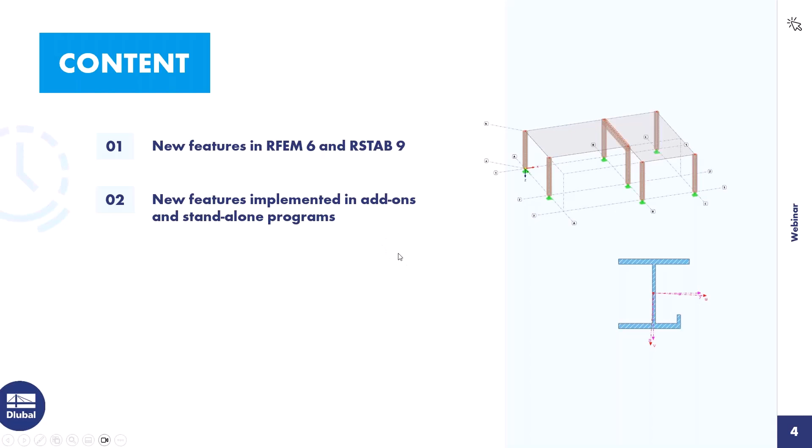Okay, then I come to the agenda today. First point is new features in RFEM 6 and RSTAB 9. I introduce some features we implemented in about the last year. Then new features implemented in the add-ons and standalone programs. The first point is for features that are directly in the main program, and those features are in the add-ons and standalone programs. Then I introduce new add-ons, and the last point is prospects. I give an overview of what we schedule to implement in the next time.

The main presentation is in PowerPoint, but I will also introduce some features directly in the program, but only for features that are in RFEM 6. I think those are the features that most of you are interested in.

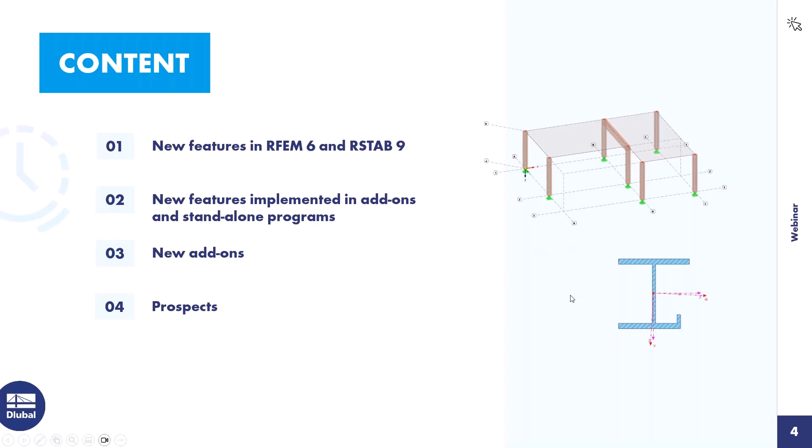Okay, then I come to the first point, new features in RFEM 6 and RSTAB 9. First feature, support force transfer from another model. We implemented a load wizard for that, and you can transfer reaction forces as nodal or line loads from one to the other model. I will show that in the program.

Next feature, new interfaces. We implemented the Tekla Structures bidirectional interface, then the STEP interface, then RSF for Allplan, and SVG. Those are vector graphics. So then I turn to the program and I introduce the first feature, the load wizard for the support force transfer.

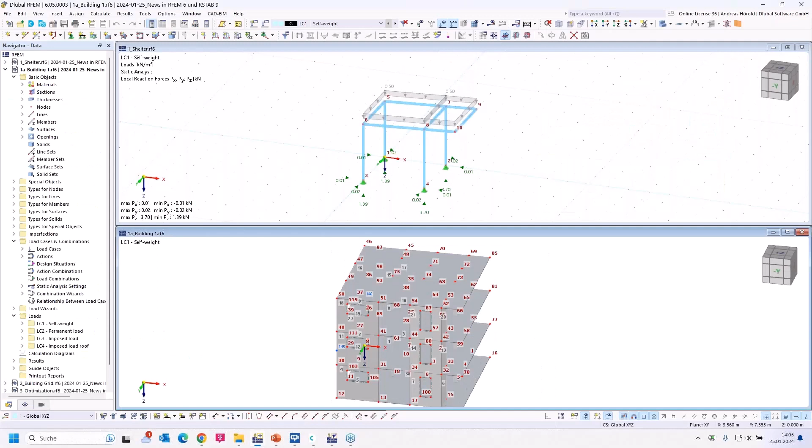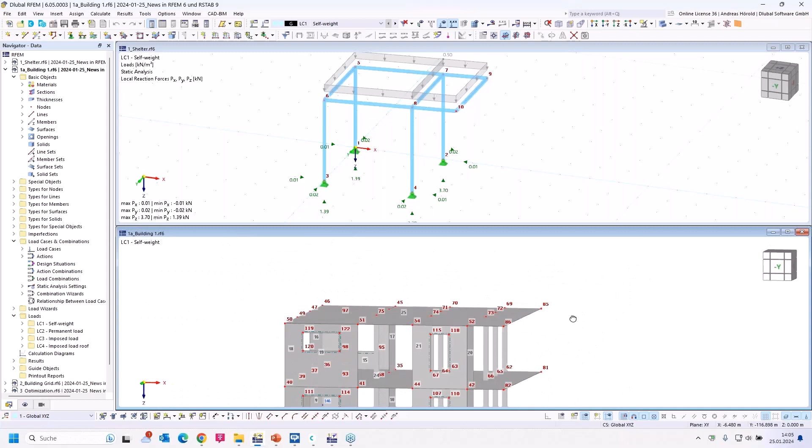So I prepared those two models. That's a small shelter that should stand on that roof here. And the 4 columns should stand on these 4 points. I select only the roof slab so that we get a better overview.

So that's quite better. And now I turn to Insert in the menu, Insert, Load Wizards, where you can see all the load wizards, the member loads wizard, and snow load and wind load wizards, and that's the new wizard, and I open it.

Important information: when you want to transfer a load from one to the other model, the models must be placed in one folder in the Dlubal Center. So I have several models in one folder. Those are the models for today, and that's number 1. And the shelter is correct for the building, so we can leave that.

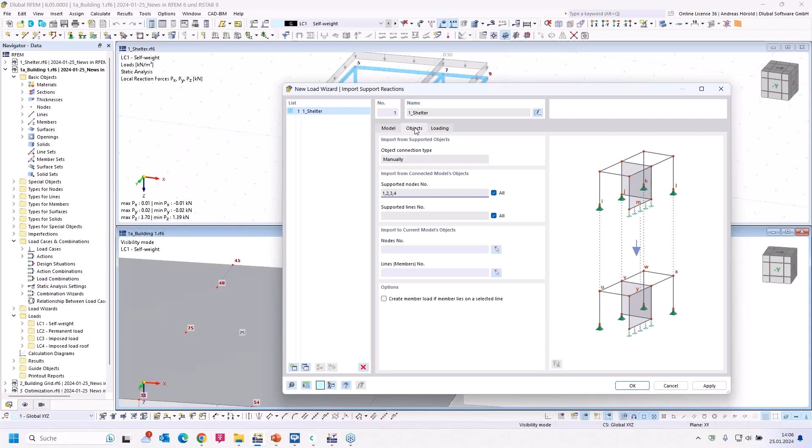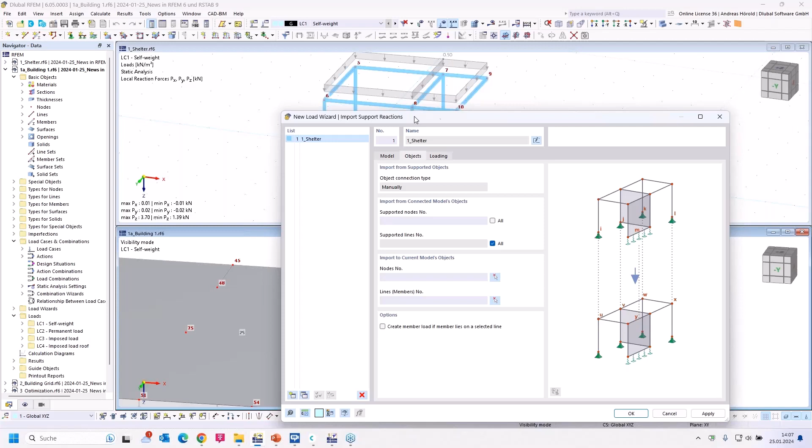I turn to the next menu, Objects. You can select the supported nodes in the shelter model. I can select all or only different nodes, when, for example, not all columns should stand on the next model. Okay, I select all. We have only nodal loads, no line loads, but it would be the same workflow.

If you have, for example, under those line supports a member in this model, then you can check that to create member loads on the selected line. Then we turn to loading. You can apply the line loads as uniform load or varying load. That depends on you.

Then you can choose the connection type manually or automatically. Manually, you can select the different load cases, loadings, and so on. I have only 1 load case in the shelter model. That's why I can do that automatically. But you can define in this table all the different load cases: load case 1 to load case 1, load case 2 to load case 2, or something like that, if you want.

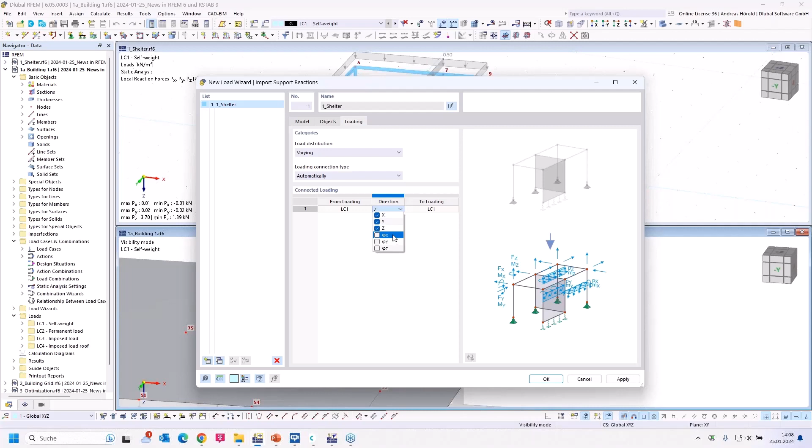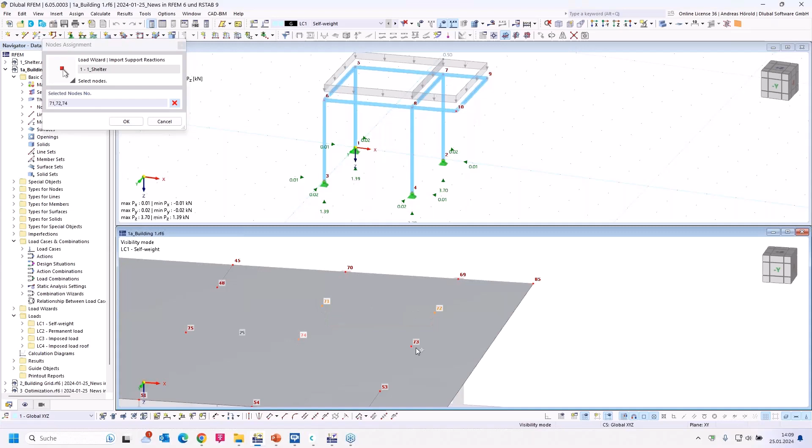Then you have to select the direction. I select all 3 directions. You can also transfer moments if you have a rigid nodal support, for example. Okay, that's all. So, I forgot something. I have to select the nodes in the building model. So I select them in the right order.

Okay, now all is fine, and you can press OK, and you see the loads, but with a question mark. They are not calculated yet. I have to start the transfer by calculating it. Now the program connects both models and transfers the loads from one load case to the new load case. And you can see, I can compare the support reactions, and in the opposite direction acts the nodal load. 3.7 on this side, and on this side 1.39.

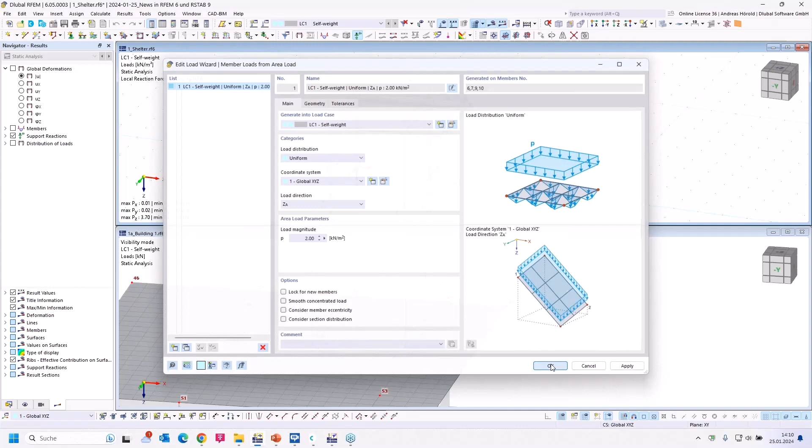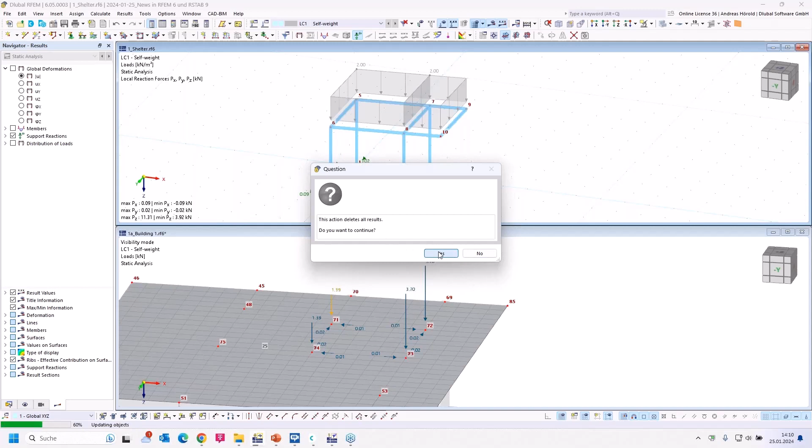So, when you change, for example, the load here in the shelter model, I enter 2 kilonewton per square meter. Okay, then I calculate the load case again. Then I save it. So then comes the question: this action deletes all results. It means the results in the building model. Yes, okay. And now I transfer the loads again.

So let's compare the reactions and loads. 11.31, and 3.92. And also the horizontal loads were transferred correctly. Okay, that's all for this feature.

I would like to show you the interfaces. Export, for example, the ASF interface. Then to Allplan, SVG, import, STEP, and so on, and the other interfaces that are already implemented. And then there are also the direct interfaces to Tekla Structures and Revit. You need to install the other application, and then there's an additional menu here. You can transfer models and so on.

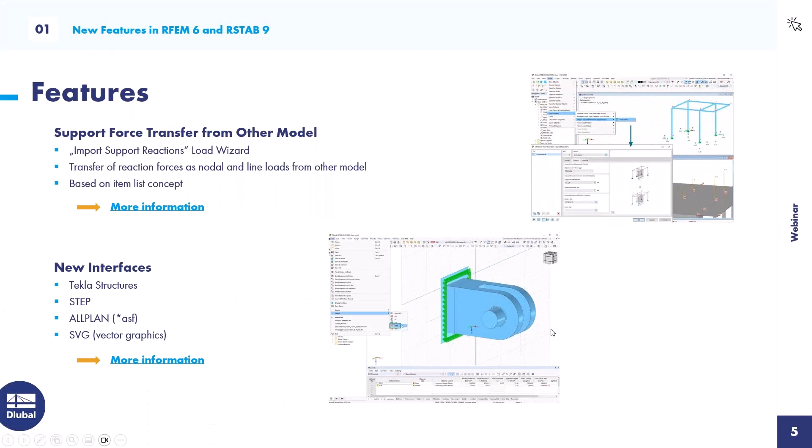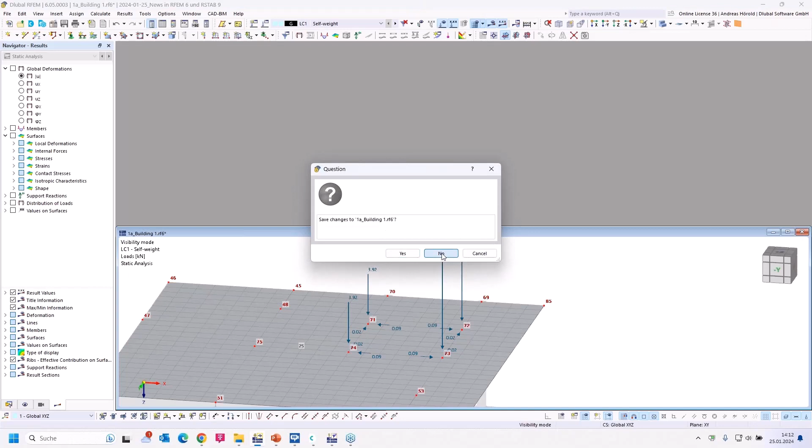Okay, I turn back to the PowerPoint. The next slide. Building grid is a new feature. You can optionally add dimensions. I show that in the program. So I close these two models. So, simple model. And I go to Insert, Guide Objects, and Building Grids. So that's the menu. You need to enter the dimensions of the grid. Usually they are known, with a space between the numbers.

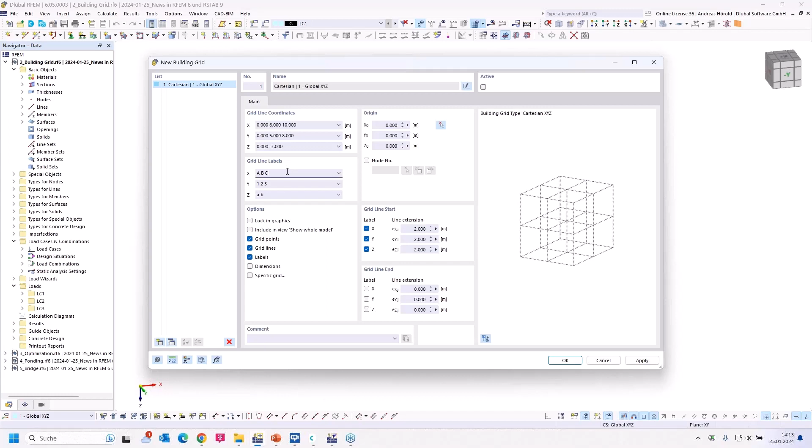Right. And 0 and -3. Okay. And you can already show that in the preview. When I press this button, I can see if it's correct. You can enter numbers here also if you want, rows and axes. I leave them as they are. You can lock it in the graphic.

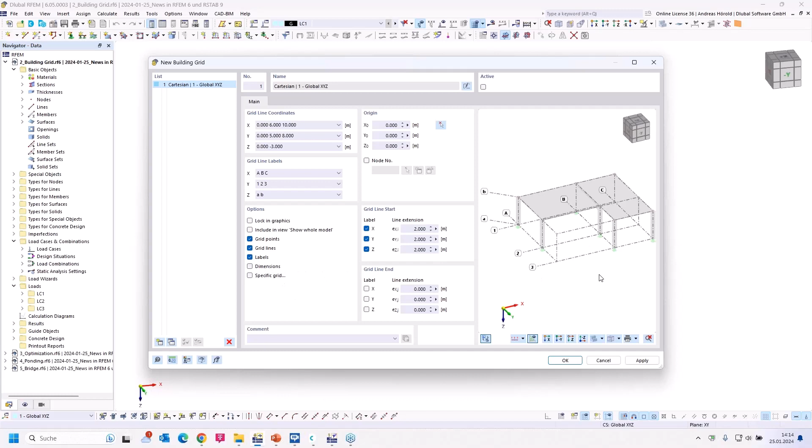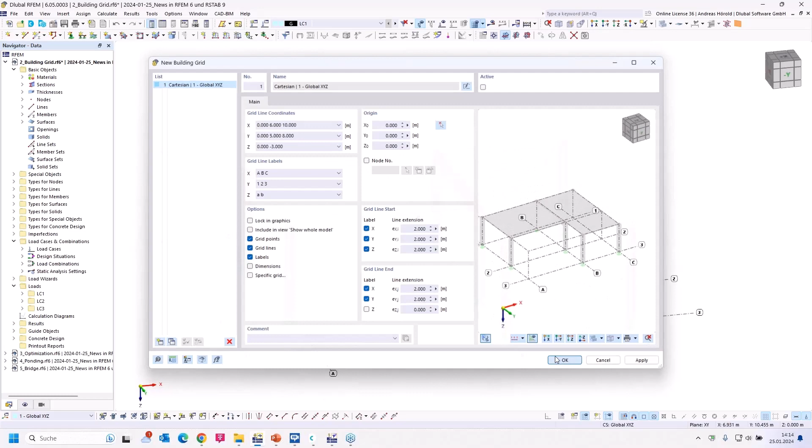You can add grid points so you can snap such cross points here. I hope we can see that. Then those are the grid lines. Those are the grid points. Labels. You can add dimensions and so on. So, if you want to enlarge the lines here, you can select those entries here. So, another 2 meters. That looks quite good. Okay, and that's the line grid. I think a quite good feature.

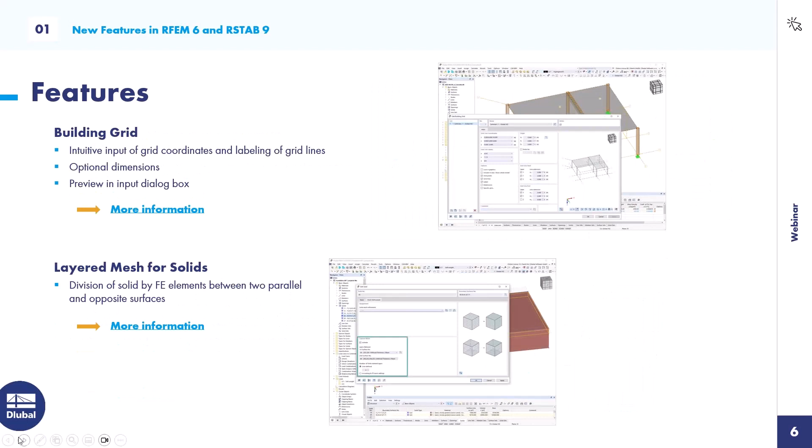So then also use the layered mesh for solids. That's for the geotechnical analysis. For example, if you have a foundation slab with a mesh size of, for example, 0.5 meter, and you have a very deep soil model, for example, 10 meters high, then you can define a larger mesh, for example, 1 meter. That's the new feature. But you can choose it also for other solids. Oh, that was too far. Sorry. So that's the new page.

Then it's possible to do a superposition of several geometric imperfection cases. We showed that already in a webinar about buckling analysis. That's, for example, for the GMNIA analysis. It's important to have that for such buckling analysis.

Then the new feature is blocks with reference to block specification. Imagine you have several similar blocks, and you can define a mother block. For example, you have more than one truss girder in your model, and when you change something in the mother block, it will be transferred to the child blocks. For example, the height of the truss girder.

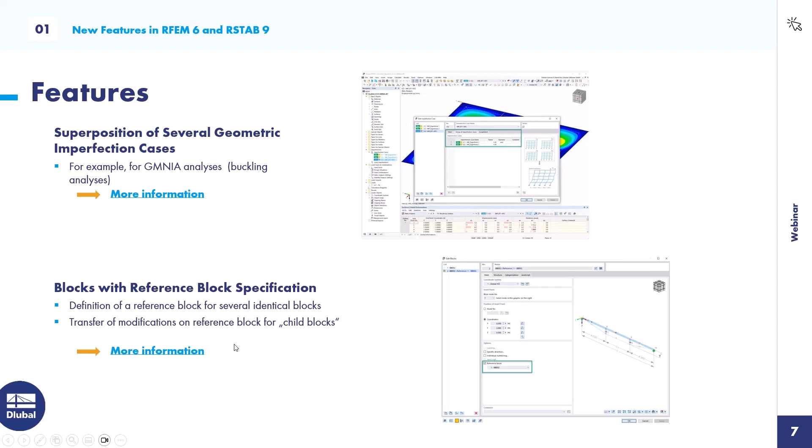Okay, then next page, optimization of cross sections. That's available in the design add-ons like steel, timber, or aluminium design. And you can optimize for a section series or for the width or depth and so on. I would like to show that on such a parameterized cross section.

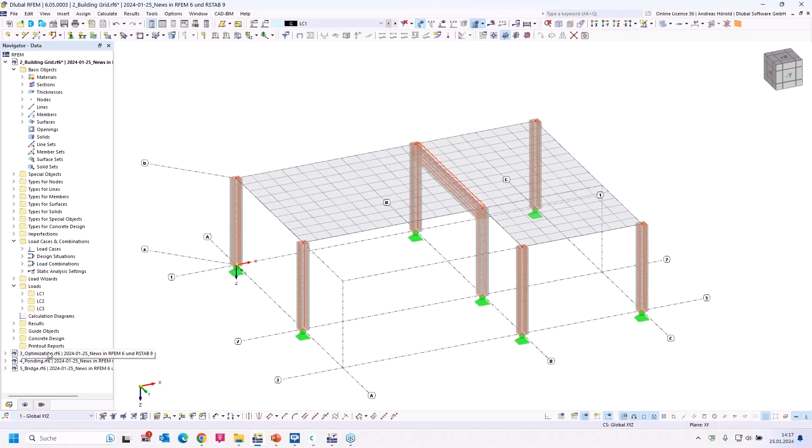I turn to the program. So this model is already designed. Let's go to the timber design. Increase the table. We get a lot of results here. I turn to the input data and to the sections. You can see the 3 sections of this model and the different utilizations.

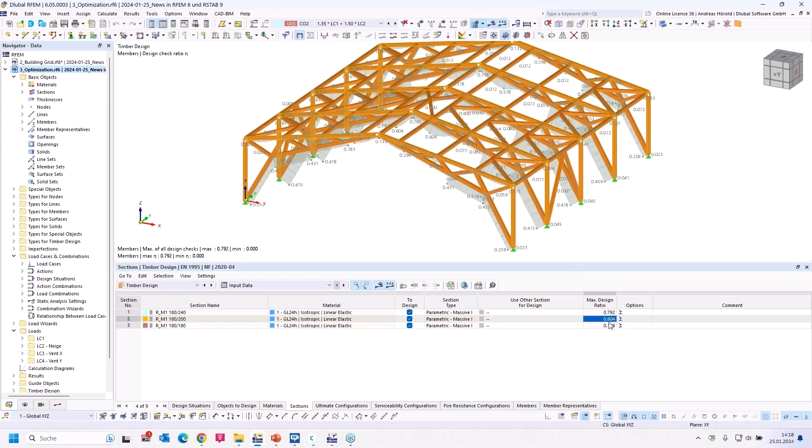This section has a utilization of 60.4%. Those are the columns and these upper beams here. And I would like to optimize it. So how to do that? I go to this table here, and I open the drop-down menu and I select optimize current row. So, and I would like to optimize the width.

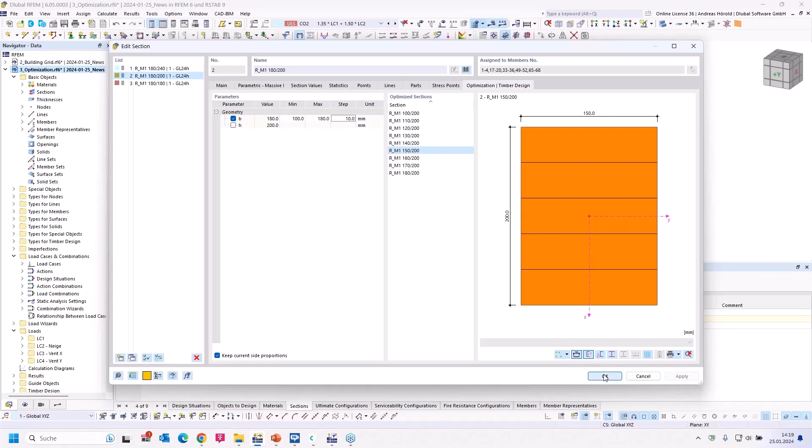We start with 100 millimeters and maximum should be 180. That's the current width. Then the step should be 10 millimeters. And now you can see in this table the available cross sections. And the program should optimize this cross section. Okay. We have to run the timber design again.

So we turn back to the input data to have a better overview. Now we have got a utilization of 99%. The optimized cross section has a width of 110 millimeters, but in the global model there is still the old cross section. That's why we need to do a right click here and use the optimized sections in the model. And then we have to calculate all again, also the load combinations in the global model.

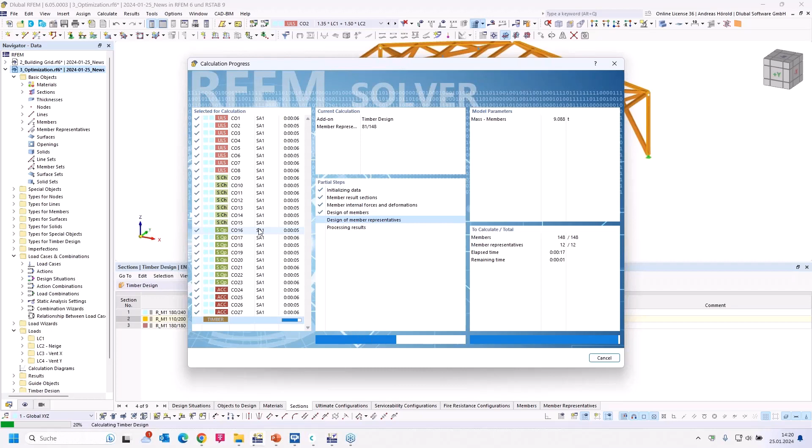The optimized cross-section has less weight, and now it considers the right cross-section. Okay, let's see what we have got. Now we've got the utilization of 96.5%. For example, for steel design, you can optimize in one row, or you can define a favorite list, for example, that the program optimizes for HEA or IPE sections in one step.

Okay, I turn back to the PowerPoint. New feature is the calculation diagram type, 2D story. That's the creation of result diagrams via building axis. It's for example necessary for the seismic, to visualize the seismic force over the building height. That's one example.

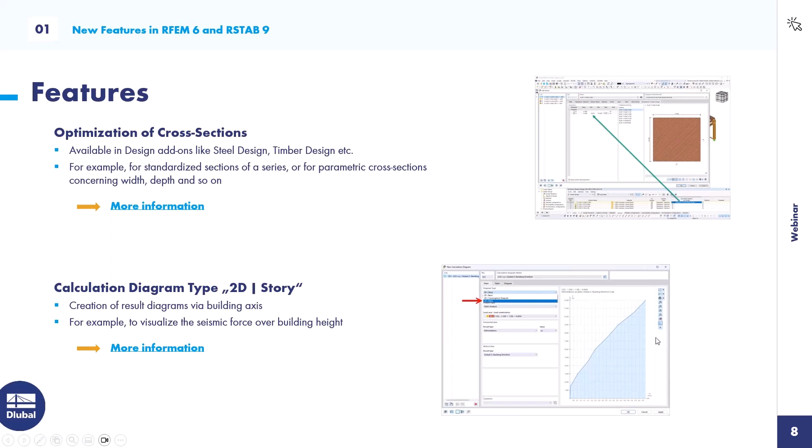Then the friction properties for line releases. Let's take a look at this model here. For example, you have a concrete slab on a steel beam, and you would like to consider the friction, then you can define such line releases. Then the ponding load type. You can consider rainfall in the ponding, and the program calculates the ponding size and transfers it to vertical loads. That's usually necessary for almost horizontal membrane roofs.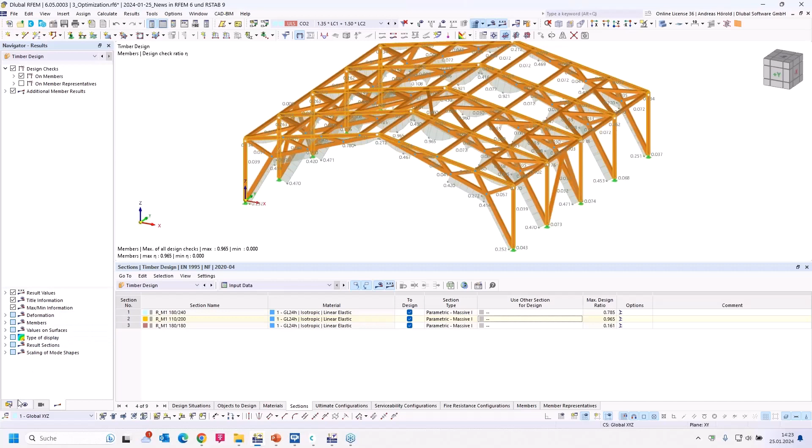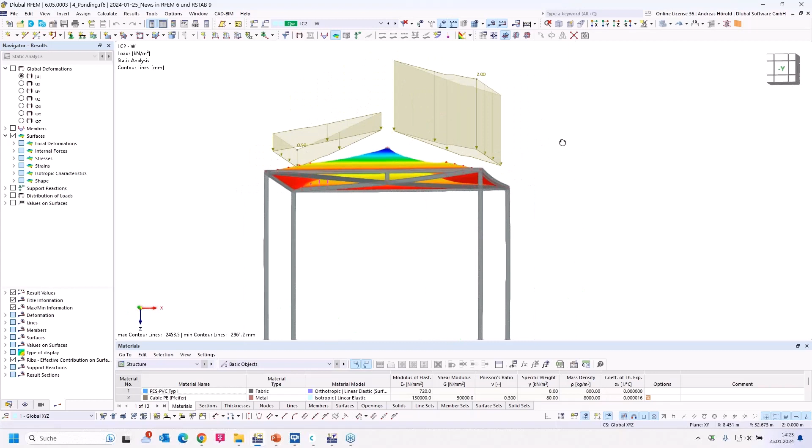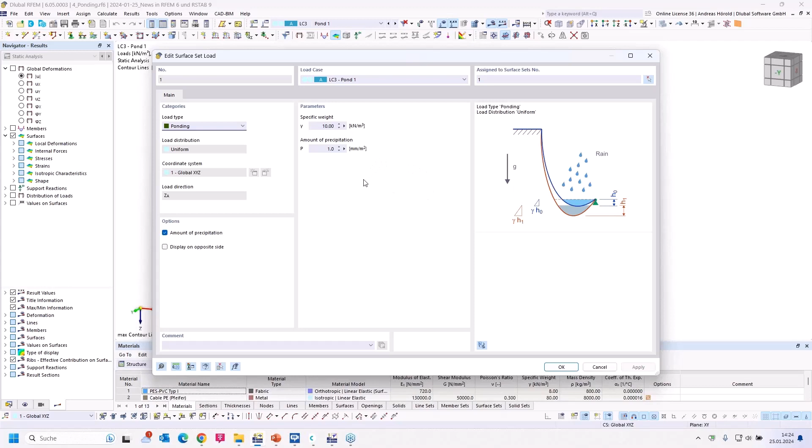I use this model in the program. Just a moment, ponding. So now such a small pavilion, with the load case pre-stress, then wind, and through the wind you get such a deformation. Then the first load case of the pond, I double click on it, and you can see the load type here, ponding. You can select the amount of precipitation and then the specific weight, in this case water, 10 kilonewton per cubic meter, and an amount of precipitation of 1 millimeter per square meter.

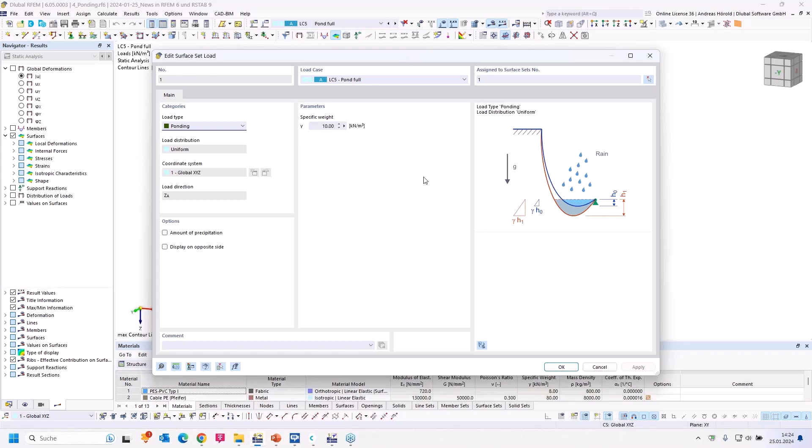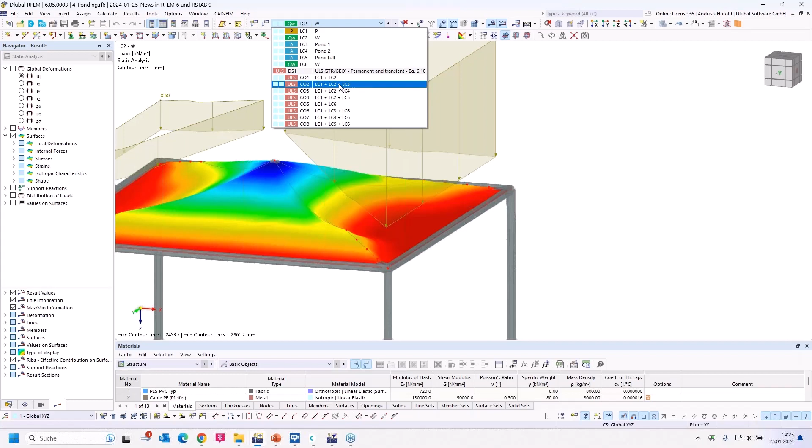Then the next load case has 2 millimeters per square meter, and the next load case where we defined no amount of precipitation. It should rain until the pond is full. And you can see in these load cases there is no deformation, only in the combination with the wind. You have got the deformation from the wind, and in this place water can collect. So let's take a look at combination number 2 with wind and pond 1.

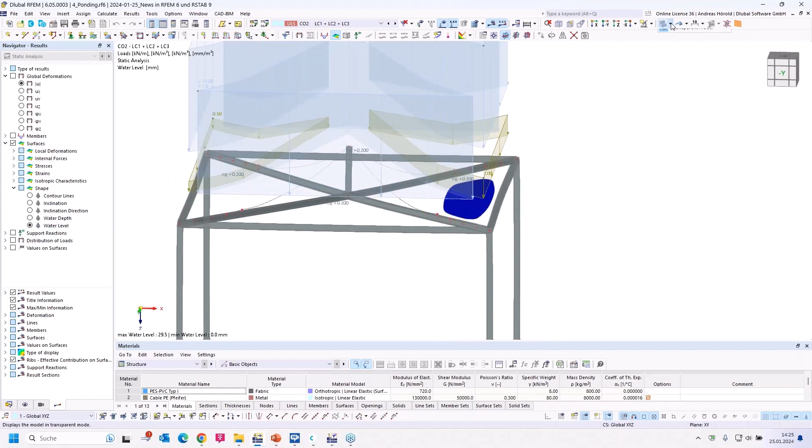And let's take a look in the navigator results, shape, and the water depth or the water level, doesn't matter. I go to the wireframe model, and you can see that's the pond for this load case, 1 millimeter per square meter, then 2 millimeters per square meter, and full. And now the pond is full, and the rest of the water flows over the edge.

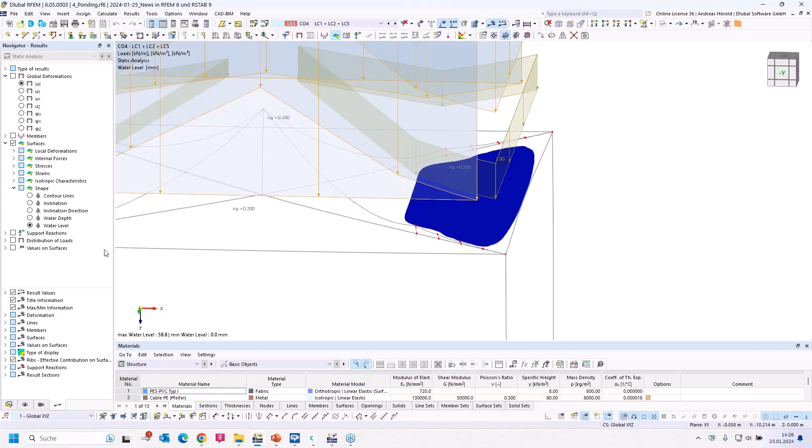And you can also select the water depth on the panel. You can see when it's full, the water depth is about 60 millimeters. Then for this combination, about 40 millimeters. And for this one, about 30 millimeters. Okay, then I turn back to the PowerPoint.

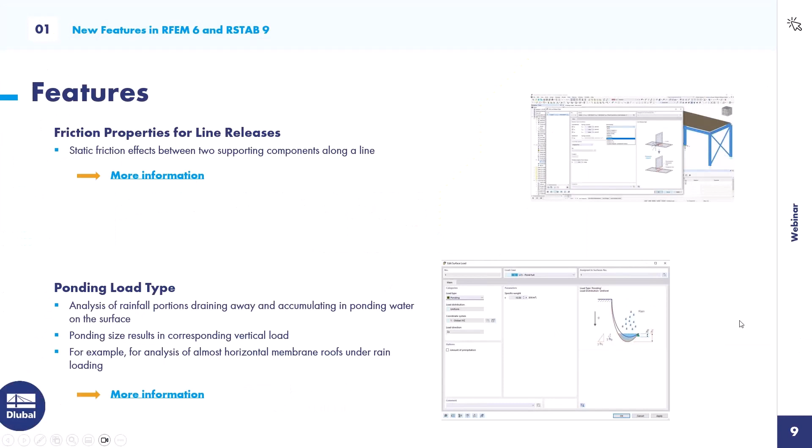Next feature, spring member type. You can define a spring constant, and usually that's force divided by displacement.

Then the generating combination with more than one initial state. You can consider different initial states for a target combination, for example, for a form finding process with varying imperfections. Then we implemented the scaffolding hinge. If you want to design scaffoldings, you can use this special hinge.

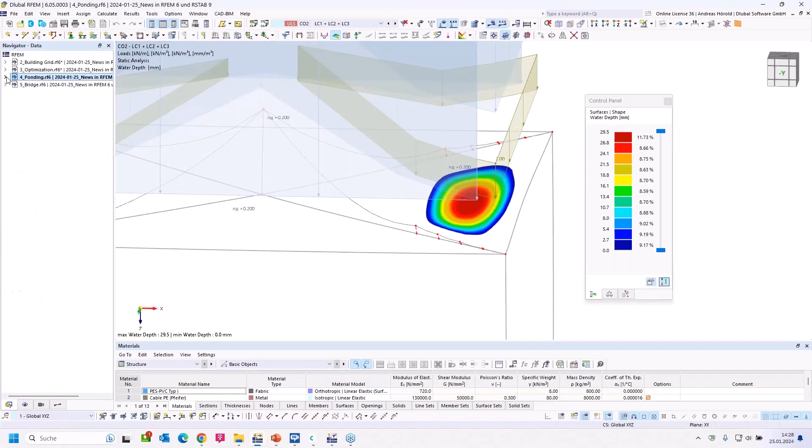Then, I think a very valuable new feature, the cross-section modification using RSECTION. You transfer a cross-section to RSECTION, and you can modify it there and import it again to RFEM. I would like to show that on an example. That's the last model for today.

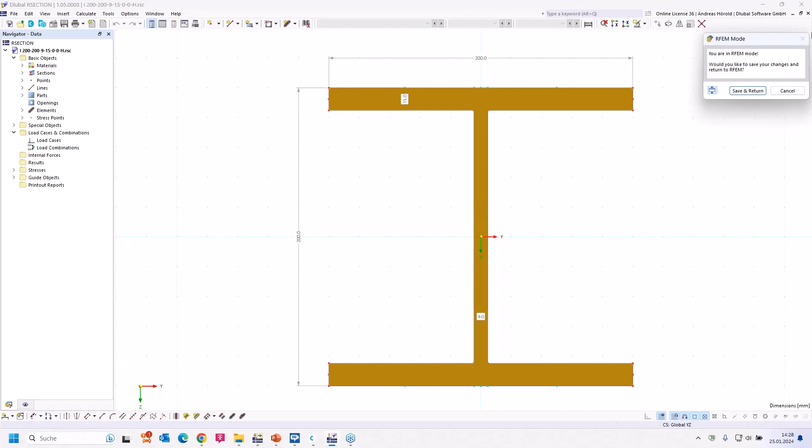So I go to the sections. I would like to change this cross-section. For example, I do a right click on it, edit. And that's the new button, the transfer to RSECTION. So I press it, RSECTION opens, and for the cross-section you can see the message there, RFEM mode.

So to modify this cross-section, I have to, just a moment, I have to explode it by right click on the section, explode. Then I modify it a little bit. Now I move that in this direction, minus 30 millimeters, okay.

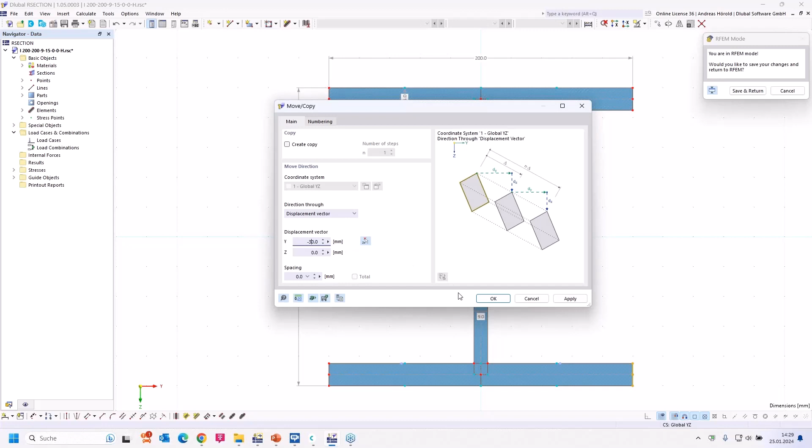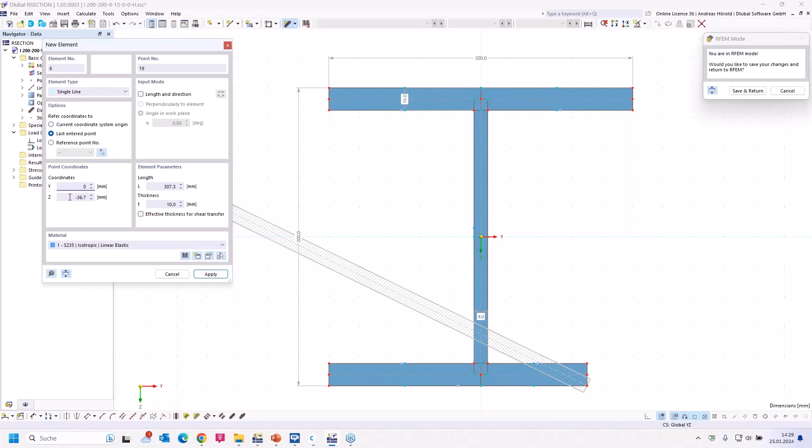And I add a new element, a line with a thickness, a small sheet. So that's the start point. Then I enter the new coordinates, minus 40, for example. Thickness 10 millimeters, that's okay. I apply that. And then I would like to transfer that back to RFEM. I have to press save and return.

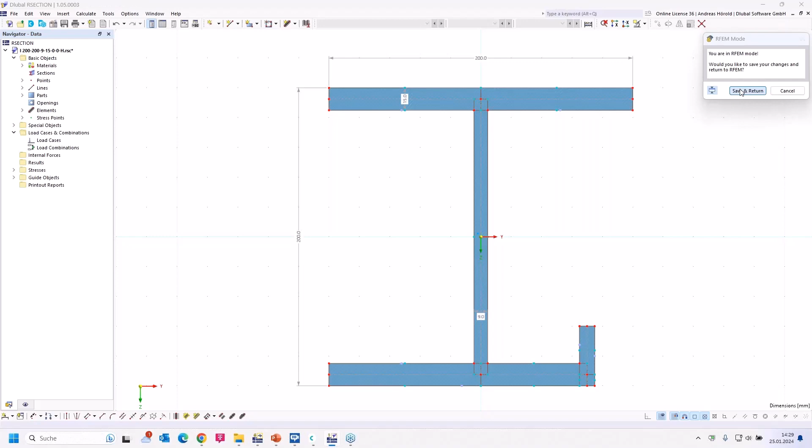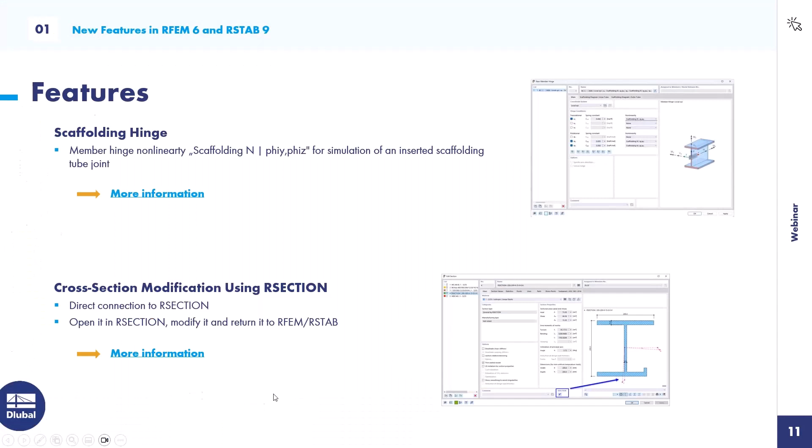So now we are back in RFEM, and you can see the modified cross-section. And now you can use it for the further calculation. Let's take a look at one of these members. Now you can see the modified cross-section. Okay, let's turn back to the PowerPoint slide.

So new features are also the cloud calculation. Maybe you know that when you have a larger model and it calculates a longer time, the power of your local computer is then less when you work in other programs, and then you can use the cloud calculation. I turn back to the program to show it. Under calculate, you can find calculate in cloud.

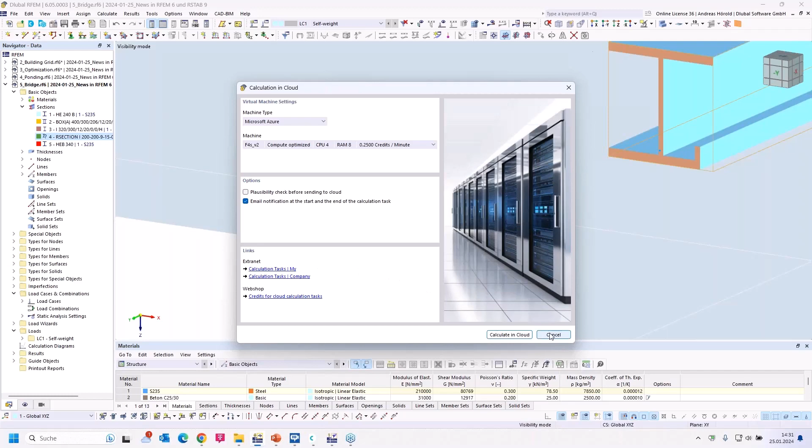And you can choose the machine type automatically or Microsoft Azure, and you can select one of these machines. But you have to buy credits for the cloud calculation, and this link leads to the web shop. And in the extranet you can see the calculation tasks of your company or your calculation tasks. I think a very good feature when you have to design larger models. Not for models that calculate 1 minute or so, but for larger models.

Then a new feature are the info bubbles for line supports. You can activate it in the navigator results. Now, for example, you can see in the bubble the description, sum, mean value, and so on.

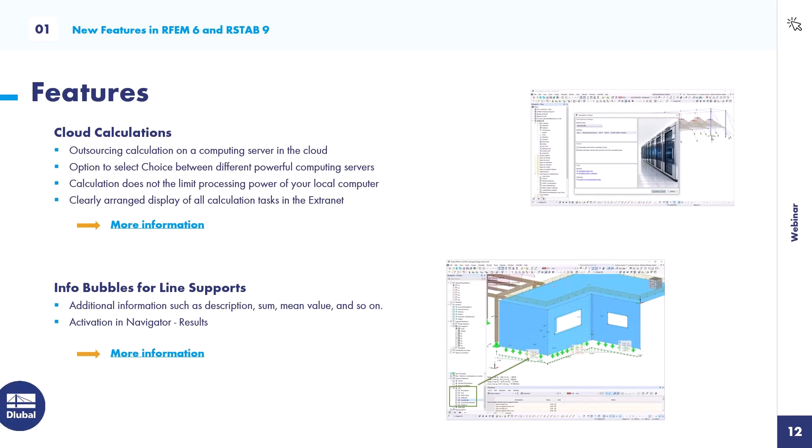Then the next new features are valid for timber constructions, but you have to define them in RFEM directly. That's why I've added them here to the new features in RFEM 6 and RSTAB 9. The shear force reduction. You can reduce the shear force with that new feature for an optimized design with a reduced shear force.

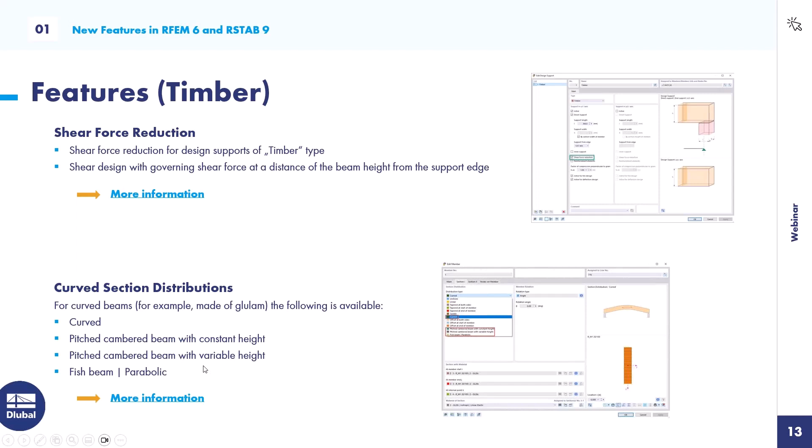Then there are curved section distributions, mainly for timber constructions: curved, pitched cambered beams, fish beams, those four beams. Then a new feature is the transversal compression stiffening elements for design supports, when you can support it with screws. Shear resistance is checked in plane of screw tip, and also a bolt analysis for pressing in and buckling.

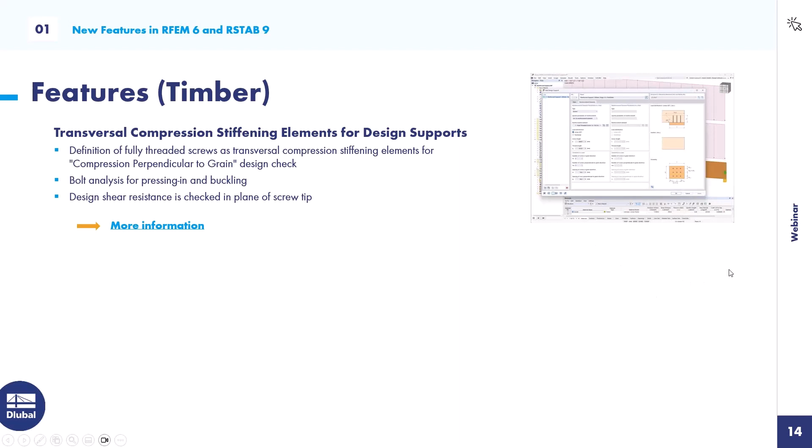Then we turn to the next point, new features in add-ons and standalone programs. I continue with the timber design add-ons. You can consider the crack factor, kcr, for surfaces. Then the design of LVL members is possible according to Eurocode 5, where 4 manufacturers are available: Pollmeier, Metsä, Steico, and Stora Enso.

Then more features in the timber design add-on are for the Swiss standard, the design of cross-sections of Massive I type. We implemented the Australian standard, and the design of CLT panels is not only available for the Eurocode, but also for the Swiss standard and US and Canadian standard.

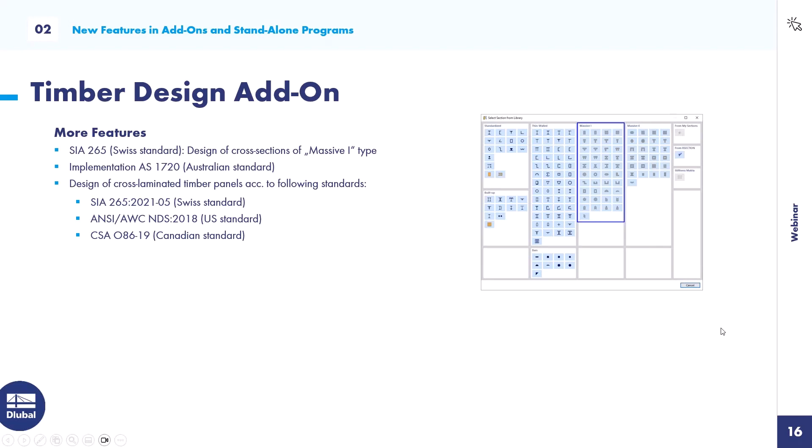Then the multi-layer surfaces add-on, where there is a library of manufacturers for CLT panels, for example, Binderholz, Derix, and so on. And there are also more compositions for the USA and Canada.

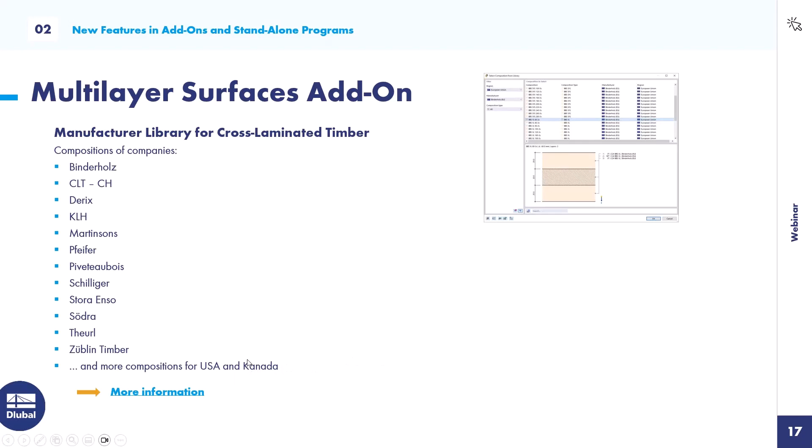Then a lot of new features in the concrete design add-on: the design of RSECTION cross-sections. You can define a cross-section in RSECTION with the longitudinal reinforcement and also the shear reinforcement. Then you can transfer it to RFEM or RSTAB and design it there. We already showed it in the webinar.

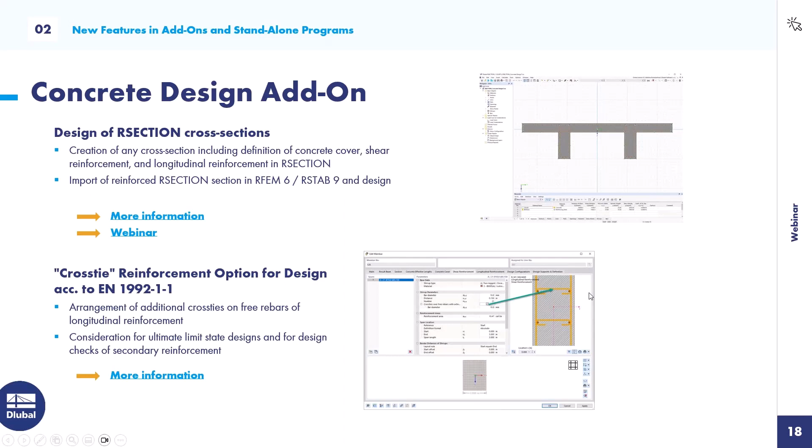Then the design of fiber reinforced concrete is possible. We already showed that in a webinar. Just click for more information on that link or watch the webinar.

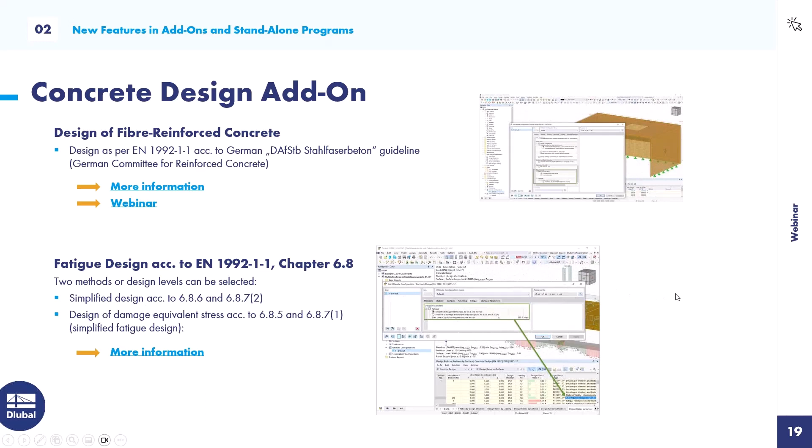Then a fatigue design is possible, and we implemented 2 different methods in the add-on. Then the seismic design according to Eurocode 8 is now possible. We showed it also in a special webinar. If you would like to get more information, just watch the webinar. I added the link here.

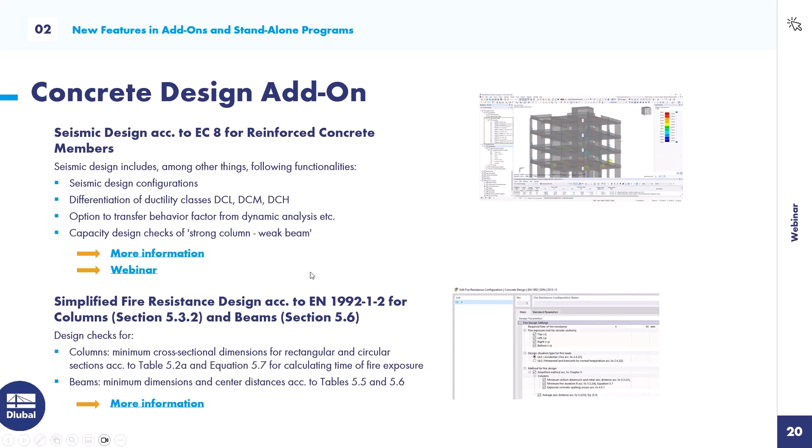Then a simplified fire resistance design is now possible according to Eurocode 2 for columns and beams. A new feature is the layout of surface reinforcement. Now you can select what the program should lay out, the rebar diameter or the rebar spacing. Often wished feature, and we implemented it.

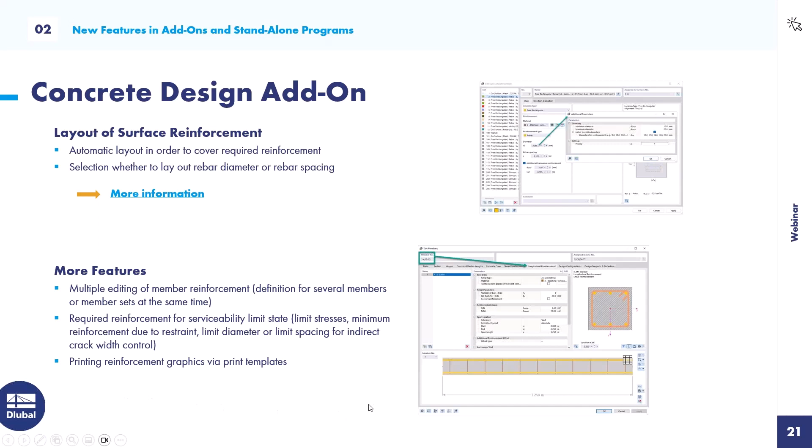And for the normal steel, we implemented new standards: the Swiss standard, then for Brazil, and the American seismic design is now available.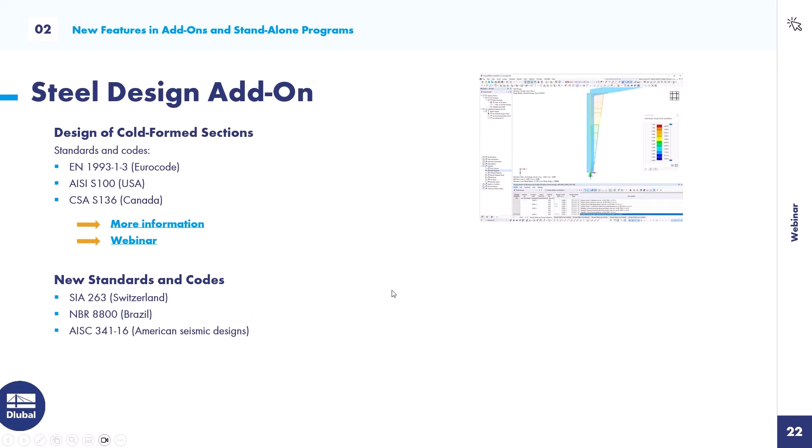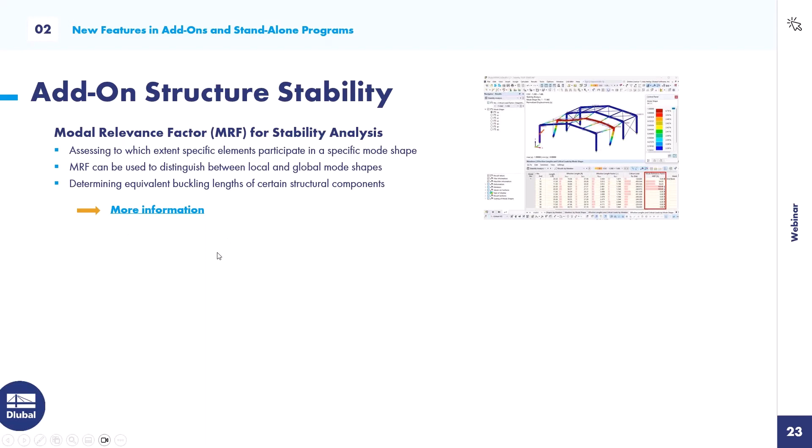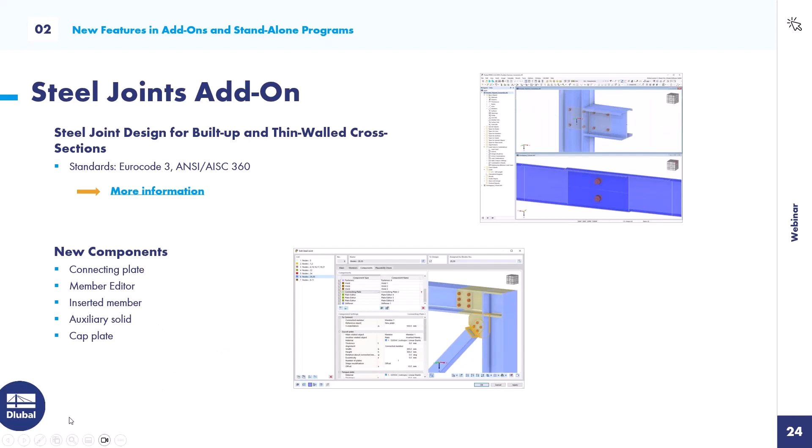Then a cap plate, for example, when you want to define a cap plate on the top of a column, then you can use that, and it takes you not many steps. Then the welds are designed plastically now. It's more effective than before.

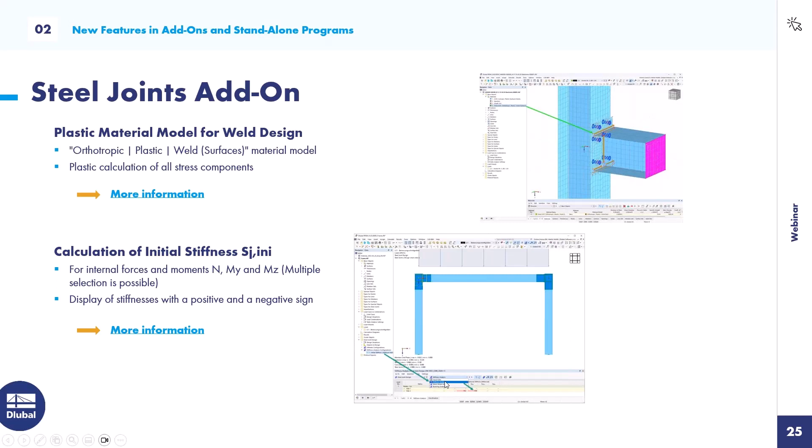Then you can calculate the initial stiffness for the normal force and the moments, and multiple selection is possible. You can find the classification in the table, whether the joint is hinged, semi-rigid or rigid. Then you can consider preloaded bolts. On all components you can define if you want to consider the preload, and it will be considered in the stress-strain analysis and the stiffness analysis.

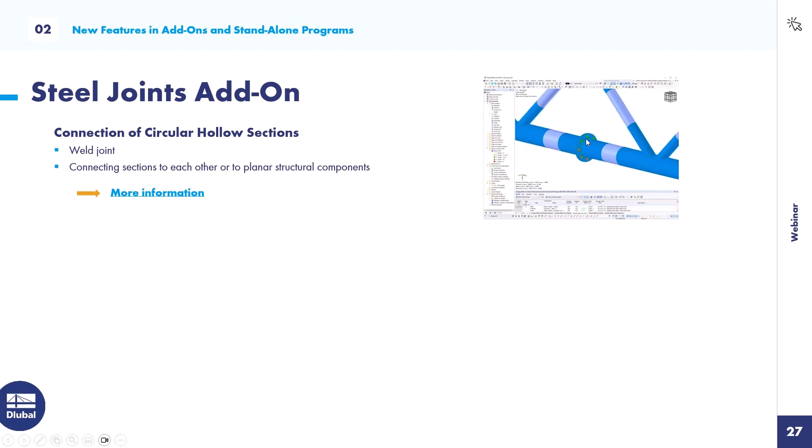Now the circular hollow sections are available with a weld joint. You can see the connection of one section to another section, or to planar structure components. You can see the weld here, and also there's a weld.

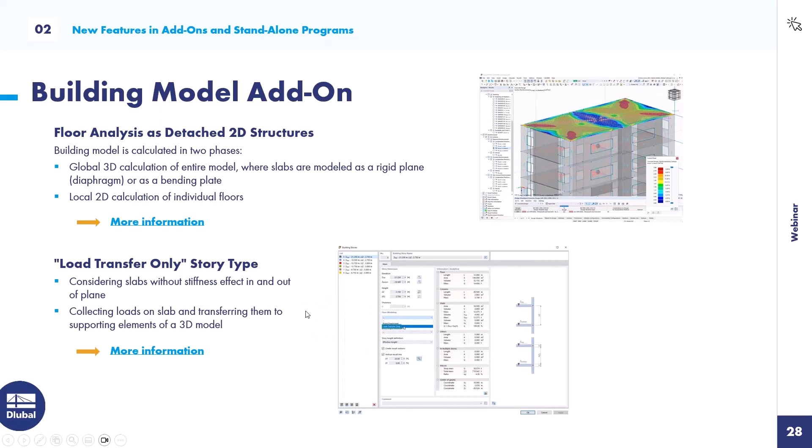Then there are different modeling tools for building models: vertical line, columns, and so on. More features are the shear walls, defining deep beams, and the building story generator.

The building story generator lets you create with one click all the building stories. When you have got such a model, with one click, all building stories are defined.

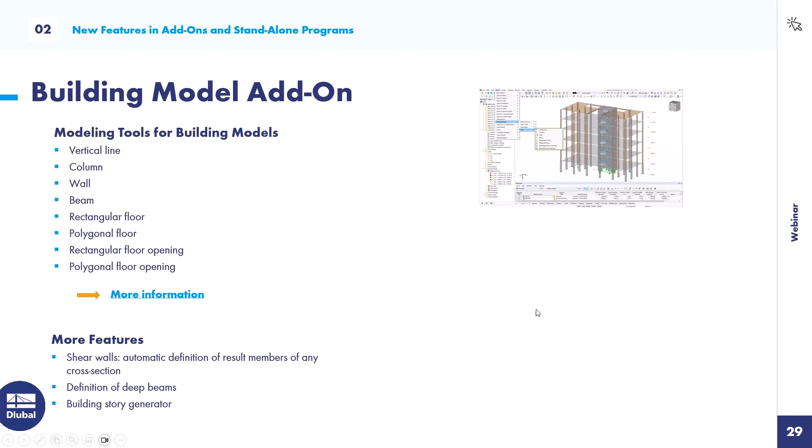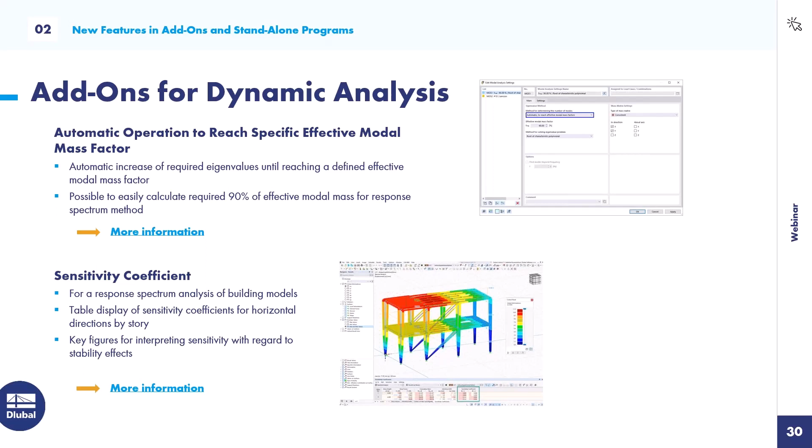Then the sensitivity coefficient is new. It's for interpreting sensitivity with regard to stability effects for building models.

Then in RSECTION, the plastic resistance with variation of shear stresses, that's available for the plastic capacity design according to the simplex method. It's an effective design if you choose that. For example, the program applies the normal stresses on the flanges and the shear stresses on the web.

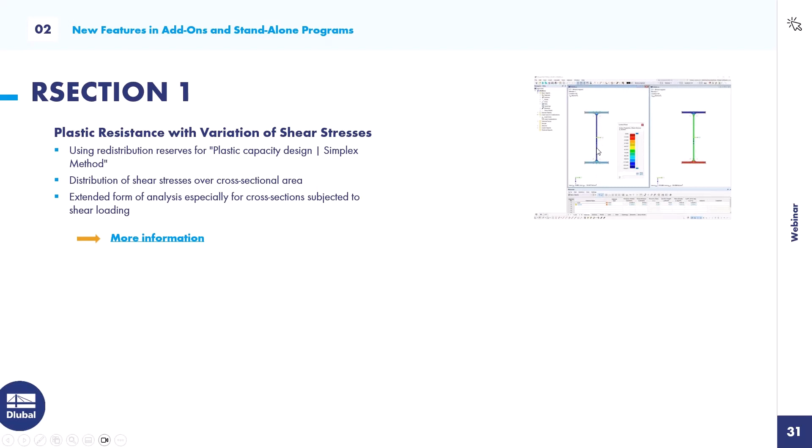So then new features in RWIND: displaying the RWIND results directly in RFEM 6. For example, the surface pressure, as you can see in the image, the CP coefficient, and so on.

More features, we showed it already in a webinar, for example, that you can use experimental data. If you are interested in these new features, just watch this webinar.

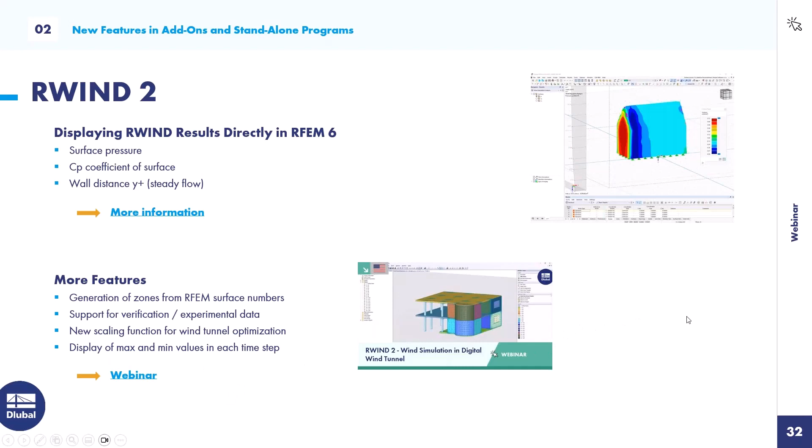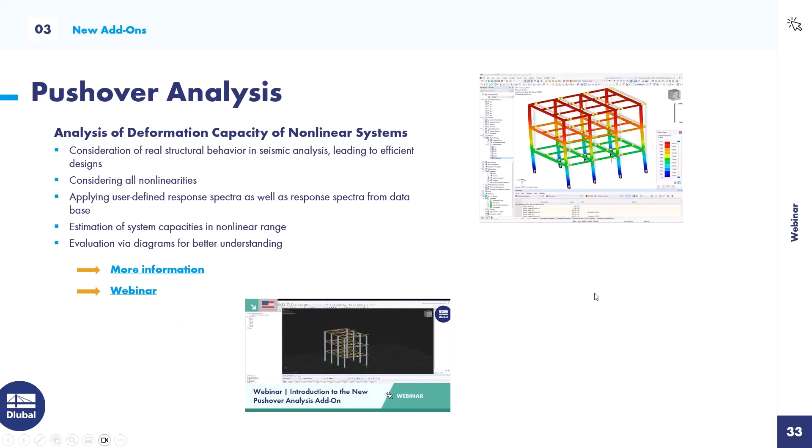Then the third point of today, new add-ons. There's a new add-on, pushover analysis. We already showed it in a webinar. You can consider the real structural behavior in seismic analysis, and it leads to an efficient design. Just watch this webinar if you want to use the pushover analysis.

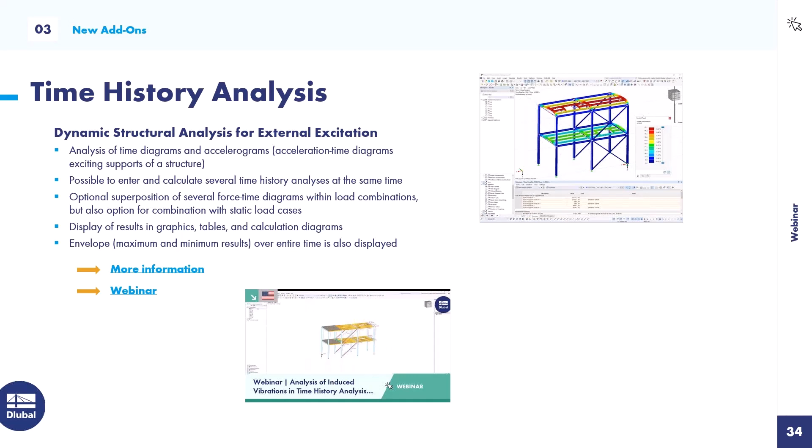Then another new feature, also for the dynamic analysis, is the time history analysis. It's an analysis of time diagrams and accelerograms. In this webinar, if you want to watch it, just click on the link, and you can see that we applied it, or we did a design for machine-induced vibrations.